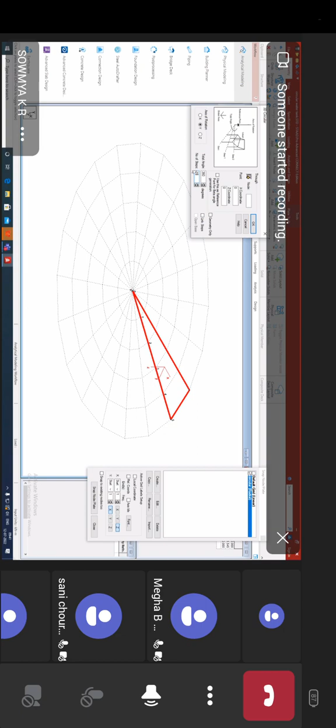The axis of rotation is Y. As we know the direction, it is all in the Y direction, and towards 360 degree, how many number of bays we need? Number of steps is equal to bays is equal to your divisions, so that will be 20. So whenever you click OK, automatically you can see your 20 bays, your plates will be created, and you can see the axis as well.

So for every plate your orientation is being turned on, and to turn off the axis that we have, it is all about Shift T. Again you have to press Shift T so that the axis will be turned off.

You need not want to mesh. Close this dialog box, meshing is not required as it is being meshed to an approximate level. So as of now the meshing is not required.

So we have created only the base of the water tank, isn't it? We have created only the base of the water tank. Now go and select your node cursor, and select any four nodes. You can select any four nodes from here, it is all any four nodes that you can able to select.

And on the geometry you can go for the translational repeat. Again on the Y direction it is all -8 meters. I'm creating the columns. It is all link steps, and when you click OK, you can able to see that the columns will be created. Choose any four nodes, go to the select menu, choose any four nodes, and create a column to -8 meters so that it will be created.

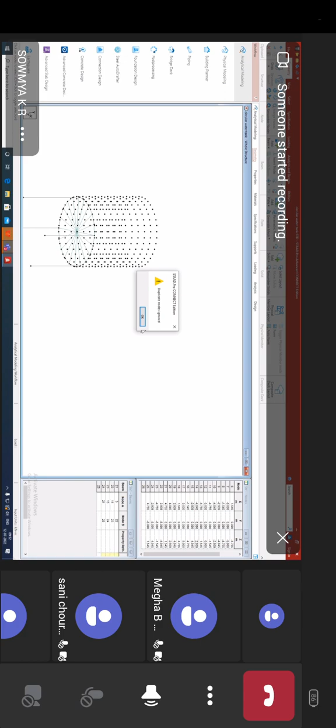I'll go for the edit, add or paste model in Staad Pro, and you can merge it. So you can see that it is all being created.

Got it? And now I'm keeping the structure on the front view. Keep your structure on the front view. Again go to your plate cursor.

Select only the bottom plates. Why am I selecting the bottom plates? To close the water tank. No, you should keep your structure in the front view.

Okay, now go and select your plate cursor at the bottom, and you can go to the translational repeat. I'm going Y, and the default spacing will be 10. The link steps and open base are not required.

Okay, it is not required. I'm going to close the water tank, and that is why I'm selecting the base as the lid. I'm going to close it at the top.

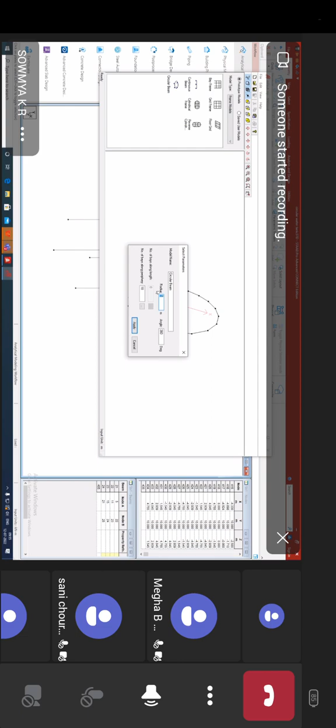Can you see? Circular beam will be there, no? Double click. You will have your circular beam in the radius along 360 degrees. Go to edit, add or paste, and that will be created at the origin.

Can you see now the circular ring beam is also created? Okay. Yes, do others have any doubt till now? No doubts. Okay, Priyanka, Chowdhury, Shylaja.

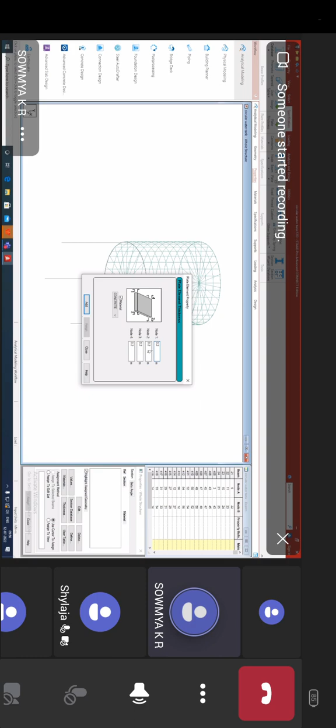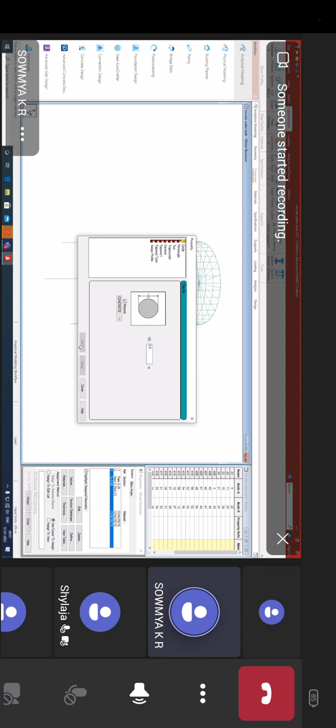So it is all about 0.2, and again you can go for define, and rectangular it is 0.3, and again I'm going for 0.6 meters. Since it is in the water tank, I'm going for 0.6 meters of the dia.

So select your plane, go to assign to view, and that will be assigned. And you can go for the rectangular, though I have my ring beam at the bottom. Keep your structure on the front view and assign it.

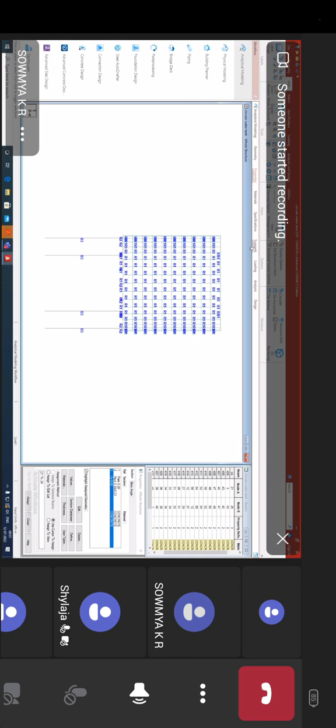Select your circular property and assign it to the columns.

So I'm going for the pinned support now.

Okay, please make a note for the bottom plate. Interpolation should be along the x direction, and your direction of pressure should be on the y direction, and you can click on add. So I'm clicking on add so that the load will be created.

Again, select your live load and click on add. Again, you can go for the same plate loads. Again, I'm going for the hydrostatic. Again, I want to select my plates. No, select all the plates, not the top one.

Okay, please leave the top plates. You need not select the top plates, considering my water tank will have water for the full tank. Yesterday we analyzed for the condition only for half of the tank, isn't it? Now we are going to analyze the water tank for the full tank. So I'm selecting all the plates, but you should not select the topmost lid - that is not required.

So I have not selected the topmost one. Only the plates that I have just selected. Again, you can go for minus 120, and it is all minus 180.

The interpolation will be along y, and the direction of pressure should be local z. Please make a note for the other plates. Your interpolation along the global direction should be y, and the direction of pressure should be z.

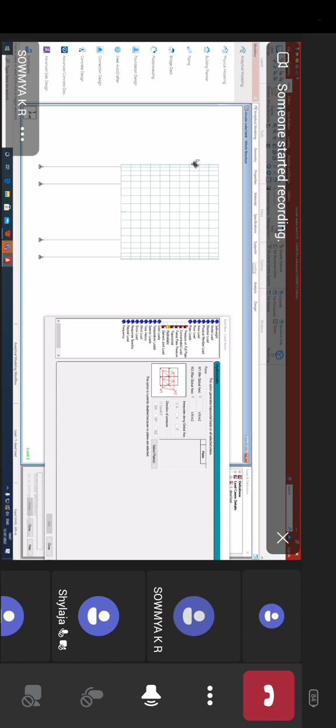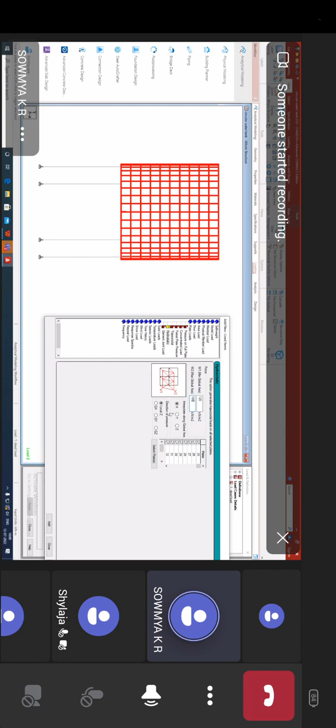I'm selecting all these plates. Again, I'm selecting one at the top as well. Again, I'm giving like 120, 180 along interpolation along GY and the local Z, because it is all circular, no? So you can go for local Z.

So you can see that the water should be pushed from inside, it should not be from outside. Can you see? I have just selected one load. No, the water pressure for the full water tank should be pushed from inside. Okay, that is what we would be creating.

And you have to give the value in the positive. You're supposed to give the value in the positive, and that is why I have changed it. And I'm going for the analysis command - perform analysis, print all, add and close, and running the analysis.

And now I'm going for view output file, or you can directly go to the post processing mode, click on apply and OK. And now you can go for the plate results.

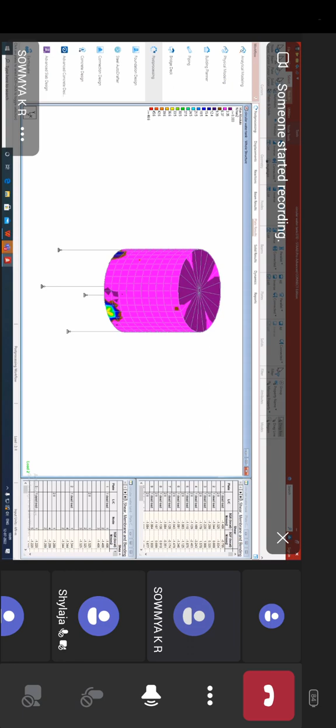So it is all maximum absolute pressure. Go to the bottom plate. You can able to see the pressure from here. So here it is all being the maximum pressure that has been applied.

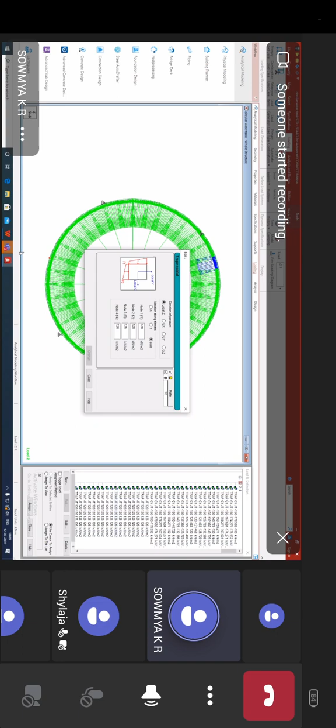So I have told you, on the analytical, on the loading, you have to give the positive value. Okay, the direction will be local Z only. The variation will be along the X direction only, but it should be your nodes, no, so that should be your positive value. We should go yes.

And you can able to see it will get analyzed. You can able to see that the circular water tank will be analyzed. The concept of giving the positive one, no, it is all being applied from inside. So it is all being applied from inside, and that is why we are giving it over here.

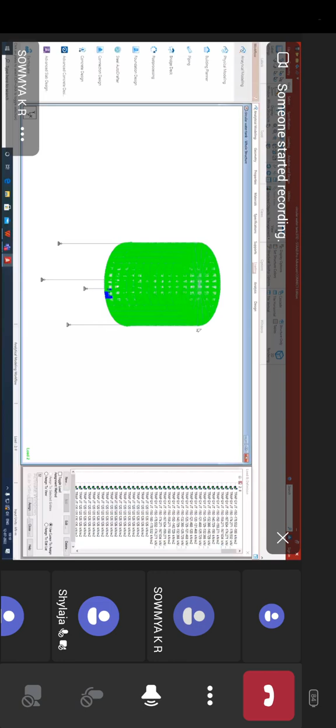Any doubts on the water tank? Do you all have any doubts on the circular water tank, everyone in the meeting?

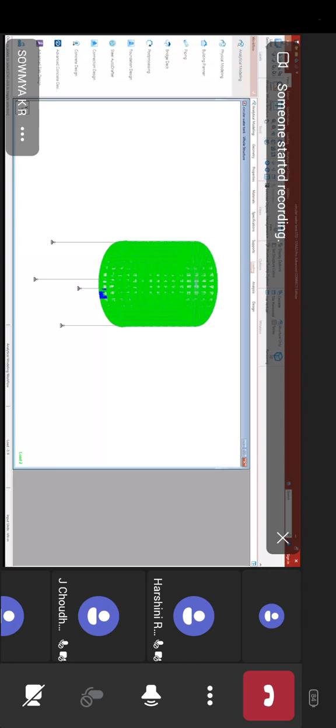Okay, so now we are going for the solid modeling. Now we are going for the solid load.

So now I'm going for the geometry solid. It is all about the complete solid modeling we are going to do, the solid generation, or solid modeling, anything you wanted to do, you can see the solid will be there. And even on the grids also, your solid grid will be there.

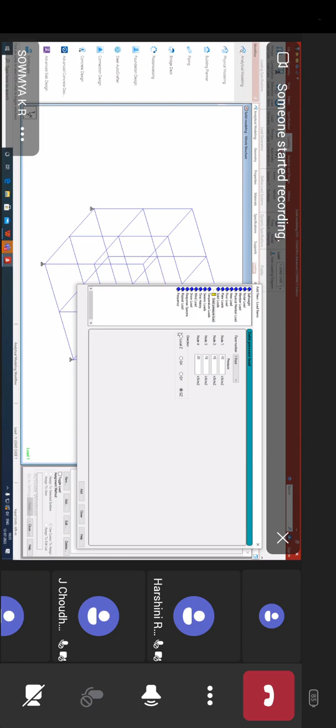So minus 10, minus 15, minus 18, minus 20, and the direction can be your GZ, or it can be the local Z. The direction can be the local Z, and you can add.

Now select your solid - you should go to the select menu, and you should make use of the solid cursor from here. So this is one solid, this is another, this is one more, and this is one. So these were all the solids - 1, 2, 3, 4, 5, 6, 7, 8. So totally there are 8 solid blocks we do have.

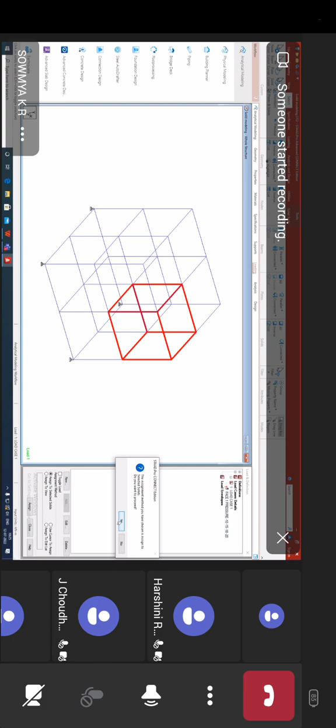Now I have just selected this particular solid. I have selected the load, and I'll go for assign to selected solids, assign, and click yes. So you can see that your solid load will be given. Any solid that you need, you can go and directly assign.

Considering your entire block as solid. Okay, consider your entire block, no, this is your structure. Considering this structure as your solid, only the outer to outer surface we are considering it as the solid, and it is all being created.

Considering we do have a block, so considering this particular solid and the outer to outer structure, we are applying the load, and we are analyzing it. Whose doubt is that? Hope it is clear. When do we use the solid modeling? Considering only the outer to outer structure.

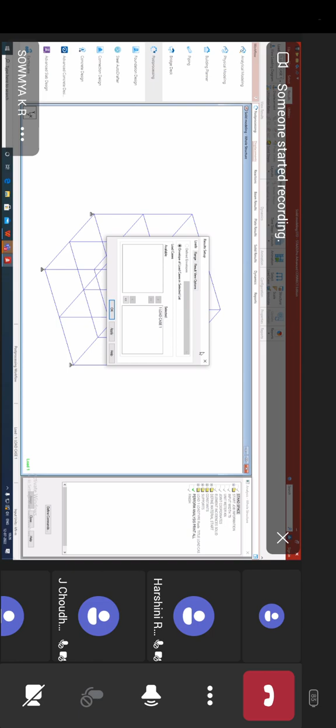Again, I'm going for analysis command, analyzing, add, and close. Again, I'm going for running analysis. So your solid modeling will be there, and you can go for the solid results and the pressure. So it is all about the pressure that we will have, completely the pressure that we will have.

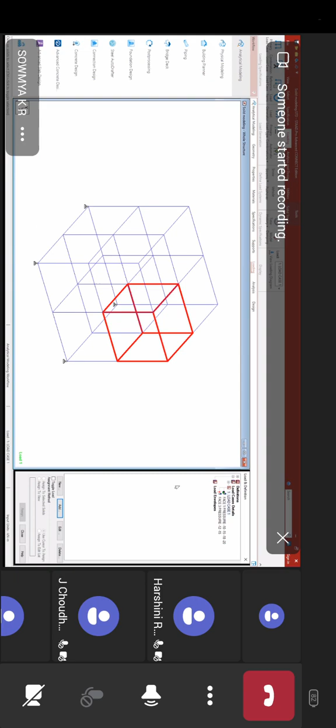Select your load case and you can go for adding. Again go for the solid load. Again you can go for the left side, -12, -15, yes, GZ, added. Again select assign, click yes, and that will be assigned.

So you can apply to all the 4 sides as well.

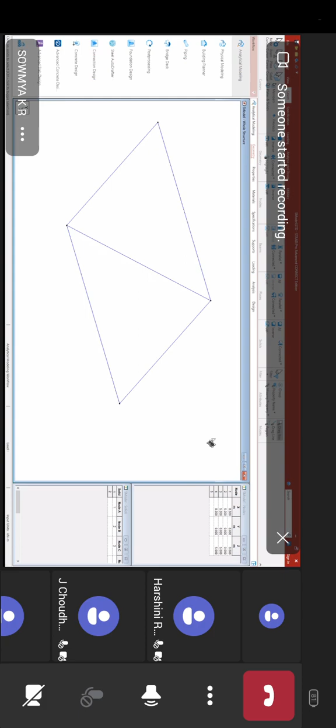Okay, so I'm going to file, new, plate models, and I'm clicking on create. Go to your grid, your quadrilateral plate. So here you can see there is a small plate that we have created, all about the plates that we have created.

Now I'm going for the specification and you should go for the plate. Please make a note: the element release in plates should be created on the specification, and you should go for the plate, and here we should go for the release.

So you will have 4 nodes, isn't it? Your plate will have 4 nodes. Which node do you want? Node 1, node 2, node 3, or node 4? So which node do you want?

And you have to release your bending moment. So you have to go for the bending moment in X, or you want to go for the bending moment in Y, or you have to go for the forces. You want to release your forces in X and Y.

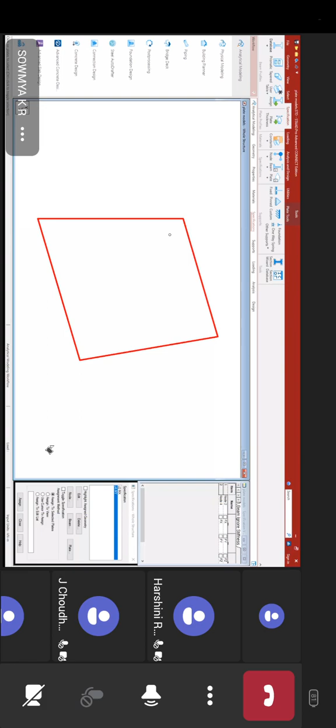So here you can see joint node 2. Suppose you want to go for joint node 4, and I would like to release it in MY, so it can be released, and you want to assign, and that will be assigned automatically.

So you can see that at joint 4 as well as joint 2, your element release will be made for all the plates.

Yes, do you all have any doubts? Do you all have any doubts till now?

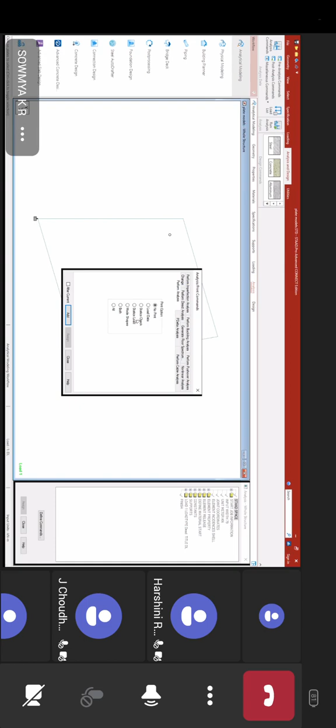Now I'm going for the loading. So it is all the dead load. I'm just adding only the self weight. Assign to view, so it is all being assigned. You can go for analysis, print all, add, close, running the analysis, view your output file.

By default, there will be no codebook that is all being available. 1.5, it is all according to the limit state method. Limit state, your factor of safety is 1.5, no, and that is why we give the 1.5.

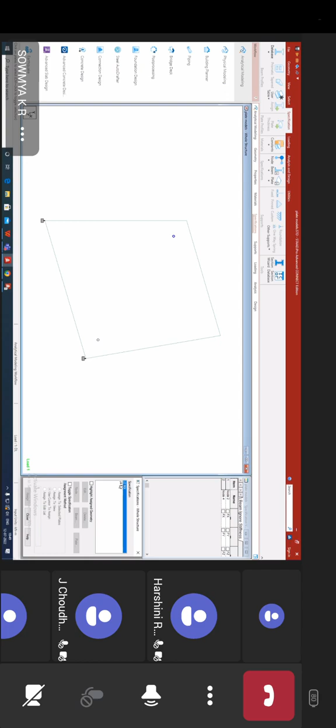Can you see there is a release in MX and MY at joint 2 as well as joint 4? So there is a release, no? So on the output you can see your MX and MY will be 0. This is all called your release.

And you can see only the MZ will be there everywhere, which means there is a load that is all being acting on the MZ. Now we all understood why we make use of element releases. Whenever you are going for the element release, which means in that respective direction your moment will be 0. This is the concept of the element release in plates as well.

Is it all very clear? Megha and Subhendra, Harshini, everyone?

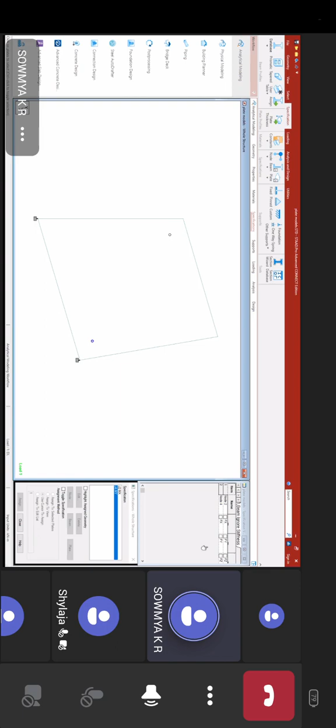Now we are going to see about the composite decks. I'm going to teach you about the composite deck now. Please make a note. The next topic is all about composite decks. It is all about metric, and we will click on create. So it is all about metric and we are going to create the composite decks.

Please make a note. It is all about composite decks, creation of the composite decks.

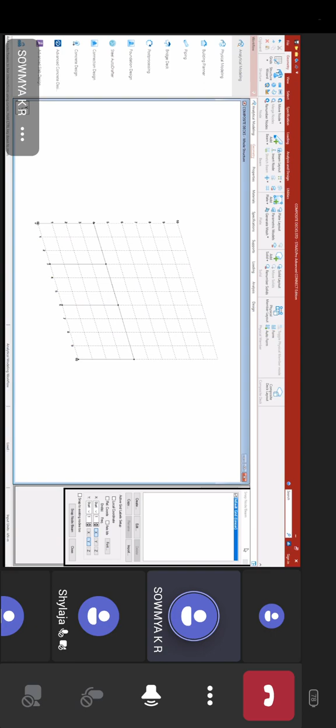Okay, so I have just created all these as my columns, and select only at the top. I'm going for front, select all these beams, and you can go for the structure wizard.

I'm going for translational repeat, and I'm going for the Z direction and number of 2 link steps in open base. Okay, I'm giving it in the Z direction. The number of steps I need, and the default step spacing can be 5 meters. Link steps in open base.

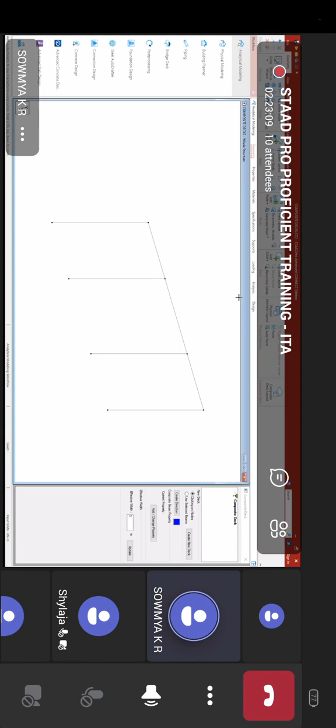So it is all about 0, 5, 10. Again you can go to 5. Again you can go for snap node or beam. One more on the 7 I'm creating, and one more on the 3 I'm creating it. So select your entire frame, how I'm selecting it.

Again go to the translational repeat. So on the Z direction, it is all about -5 meters, and I need the number of steps to be 2 link steps, and you can enable open base.

Please make a note, only one we have created. So after creation of one, after it is being created, okay, you should go for the Z direction, number of steps to be 2 and -5 meters. Again it is all link steps and open.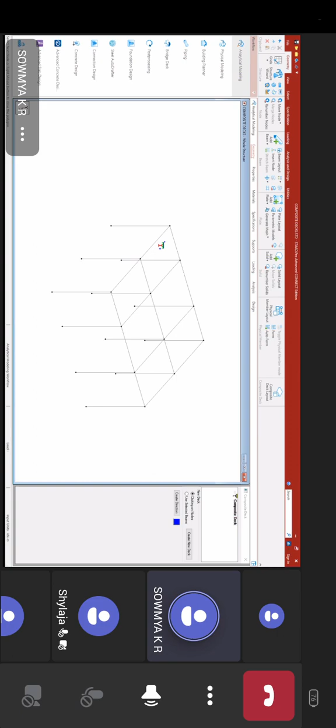And here we are supposed to go for the create deck. So it is all 1, 2, 3, 4. Again back to the first option, and it will ask you the name. So it is all about your deck slab, isn't it?

So I'm going for the deck slab from here. I'm just giving the name as deck slab and clicking OK. Automatically you can see that the beam will be created. Once it is all being created, the deck, next it is all about the direction.

So in which direction the composite deck layout is being created. You are supposed to select 2 beams. If you select these 2 beams along the Z direction, and click on create direction, automatically your direction will be created. Suppose if you're selecting these 2 beams and going for create direction, along that direction it will be created.

So if you're selecting one beam and go for create direction, 2 beams need to be selected. It will ask you in the same way. So I'm selecting 2 beams like this. Can you see? Going for creating the direction, you can see the deck direction will be created. Either the horizontal way that you need, or something on the vertical way, you can see that it will be created. So this is all called your deck slab and your beams are all created, no?

And next you can add or change any existing property. I wanted to give the property for this deck layout, so I'm going for adding or changing the property over here. The moment you click on adding or changing, select all your beams.

It will say that it is all about an Indian... Please remember, this is a composite deck. Whenever we call it composite, it means two different materials will be applied - one will be your steel and one will be your concrete, isn't it? It means your beam property - so it is all about the composite beam property we will call. So all your beams will have composite steel as well as concrete.

What do we mean by the direction? Create direction, that is what is your doubt, no? Changing direction means along the one way slab, or it can be along the two way slab. Say for example, let me go and create the slab over here.

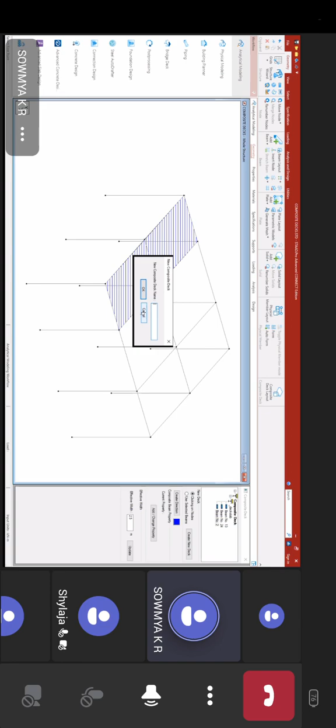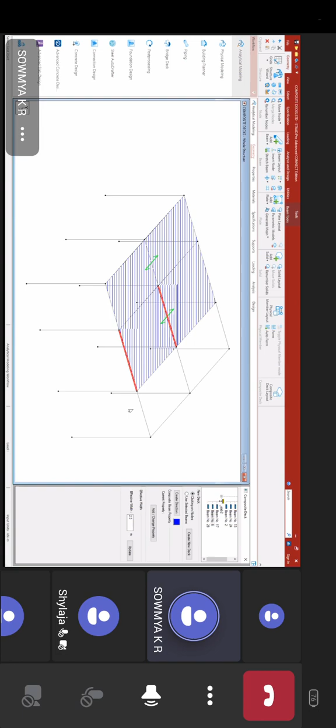And again three more beams are all being created. So it is all completely which direction you wanted, in that direction your beams will be created. So either it can be a one way slab or it can be a two way slab, and only that you can see that your beams, your direction for your beams, it will be created. It is all completely the direction.

So in which direction can you see the blue color one? Maybe you want me to change the color. I'll change the color also.

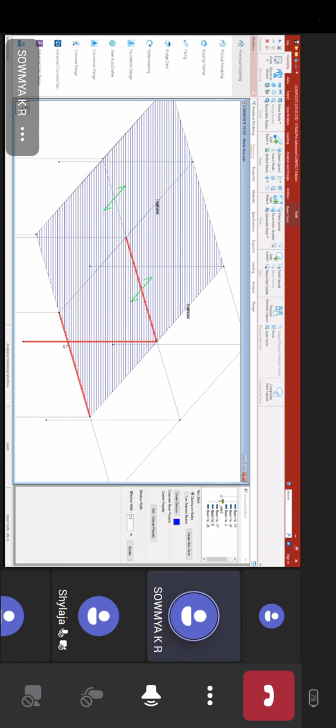Which direction does it go? Suppose if I'm going for these two, create direction. Again the direction will be changed. Okay, so now it is all about your ISMB 200, and it is all being given.

And now I'm going for effective width. So what is the effective width? It is all about 3 meter, and that will be updated. Now the effective width of your slab, that you can able to see, it is all being updated from here.

Can you see? So now it is all your changes that we do have, and you can able to see the beam, it is all being applied. And now if you want to change the direction, okay, I have just created everything. Can you see the concrete properties?

See, you're selecting your deck slab, and now I am going for my concrete thickness. Can you see the concrete thickness? It is all about 0.15.

And what is the unit weight? It is all 25 kilonewton per cubic meter, and my concrete grade will be 20,000. So it is all 20,000 kilonewton per meter square. Please make a note, it is all 20,000 kilonewton per meter square.

Now I'm going for the stud diameter. Stud is in small column. Stud will be given only in the bridges, and that is in small column that we will have, which will be very much used in the bridges.

So you can go for the stud diameter of 1.5 inches, or it can be 3 by 4, or it can be 5 by 8. So what will be the stud length? You can give the stud length to be 1.5. Mostly that will be in small one only, so you can go for a stud length of 1.5.

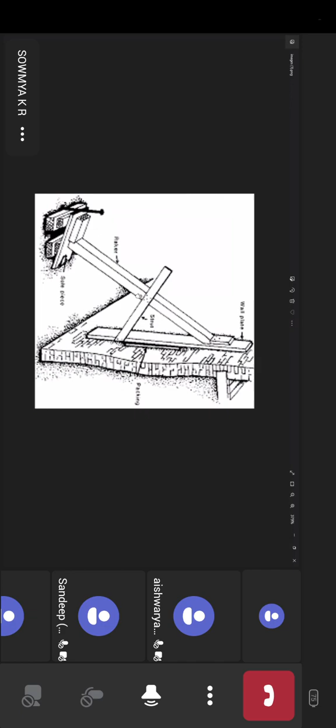So here you can able to see this is a strut or start, that will be in small column, and that will be connected to another beam. So that is all called as shoring.

Shoring, or your strut, whichever you say, that will be connected, or it is all being tied up with some other element, and that is all called as your strut. And this is your wall, and this is all called as your shoring.

So stud diameter, you can able to provide it. Now you all understood? Is it all very clear of your composite decks? You have to create a small deck, and you have to choose your create direction, concrete thickness, your unit weight of concrete, your concrete grade, and the properties for your beam.

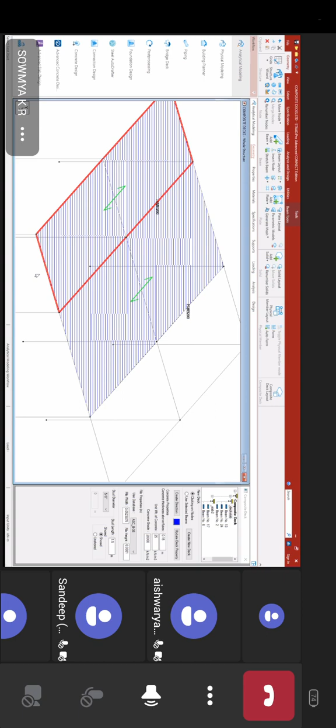15 डिग्री पर क्लियर है। 8 चाहिए, ठीक है। 8 देने के बाद मैं इसे ओके करूँगा, तो मेरे हर 15 डिग्री पर मेरे पास 8 लाइनें आएंगी। कर लोगे, वापस करके बता दो।

लाइन बना दी, ठीक है। रेक्टेंगल बनाओ। रेक्टेंगल बनाता हूँ, रेक्टेंगल बना लिया। मैं गया रोटेट पर, फर्स्ट पॉइंट चूज़ करा।

फर्स्ट पॉइंट चूज़ करने के बाद उसमें मान लो कितना डायरेक्शन आप देना चाहते हो, डुप्लीकेट कितने देना चाहते हो, और एंगल कितना देना चाहते हो हर एक डायरेक्शन के पीछे। तो मान लो मुझे यहाँ पर सिर्फ एक ही डुप्लीकेट चाहिए, ठीक है, या मुझे 4 चाहिए, और चारों 90 डिग्री पर मुझे चाहिए।

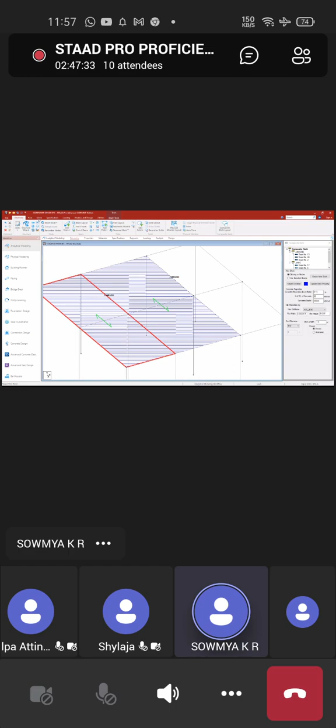ठीक है, तो मैं क्या करता हूँ, यहाँ पर दे देता हूँ 4। इसका एंगल दे देता हूँ सबको 90 डिग्री। अगर 90 डिग्री पर सेलेक्ट करते हुए जा रहा हूँ, तो ये दो बीम तैयार हो गए। समझ में आ गया?

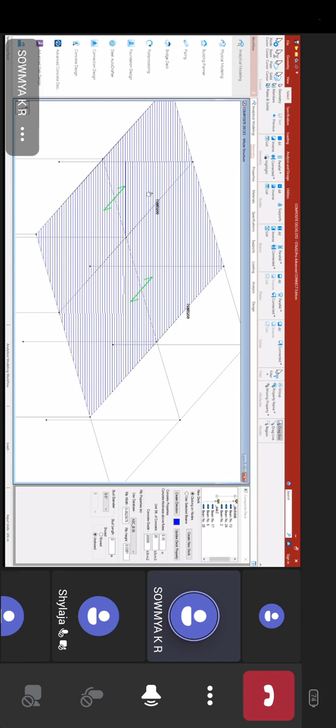ट्रांसलेट कराता हूँ। अब ये मुझसे पूछेगा क्या देना है क्या नहीं। ध्यान रखना है, ओके का मोड है ना वो, वो तब तक डार्क नहीं होगा जब तक आप मेन चीज़ नहीं करोगे। जैसे मैं इसको सिलेक्ट करूँगा, सेलेक्ट करने के बाद मैं इसको पॉइंट दे दूँगा, अब वो पॉइंट डार्क हो जाएगा।

पॉइंट देने के बाद मैं क्या करूँगा, कितने लेने हैं मेरे को, 8 लेने हैं। अब पॉइंट दे दिया मैंने उसको। अब पॉइंट देने के बाद वो पूछने लगेगा क्या है क्या नहीं है, ओके करने के लिए बोल दिया। जैसे मैं ओके करूँगा...

देने लग गया, ठीक है। अब मैं चाहूँ तो इनकी डिस्टेंस चेंज कर सकता हूँ, क्योंकि सबकी डिस्टेंस मैं यहाँ से दे सकता हूँ। और मैं जितनी भी कॉपीज़ हैं वो यहाँ से एडिट कर सकता हूँ, कितनी चाहिए। अब मुझे मान लो 4 ही चाहिए, ठीक है, तो जैसे मैं इसको ओके करूँगा तो 4 आ जाएगी।

और लेंथ जैसे मैं कर देता हूँ 50, ठीक है, और ओके कर दूँगा। तो देखो 4 आ गए, 4 कॉपी आ गई मेन ऑब्जेक्ट के अलावा। और उन दोनों के बीच में जो डिस्टेंस है वो 50 आ गई है।

50 किस चीज़ की डिस्टेंस है, इस पॉइंट से लेकर इस पॉइंट तक की डिस्टेंस। समझ में आया, ठीक है। अब उसको जहाँ पर मुझे सेट करना है मैं वहाँ पर सेट करता हूँ। दोबारा बताऊँ?

Can you change the color? The direction between the selected beams are changed.

Yes, of course. पॉइंट बना लिया, इस डायरेक्शन में ये दोनों सिलेक्ट करके ट्रांसलेट पर गया। और जब भी मैं डायरेक्शन के लिए जाता हूँ, तो कितनी कॉपी लानी है वो लेना है, 5 इसके अलावा, ठीक है। मान लो अगर आप इन दोनों को सिलेक्ट करो, मैं जाके नया डेक क्रिएट करूँगा।

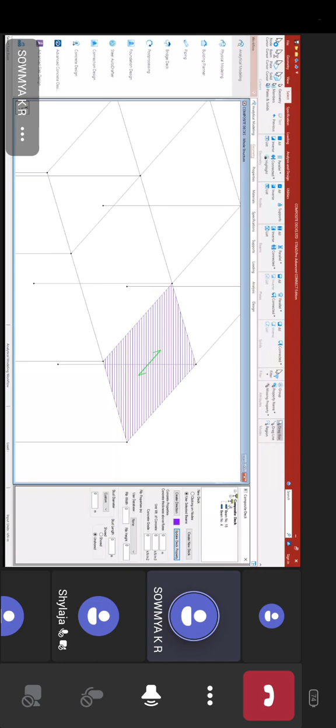Now you select your beam, and now I'm going for 0.15. Unit weight will be 20,000 and your concrete grade will be, oh sorry, unit weight will be 25, and using the above database it is all Verco N, stud diameter it is all 1, stud length it is all 1 meter.

Now is it all very clear of creating the composite decks?

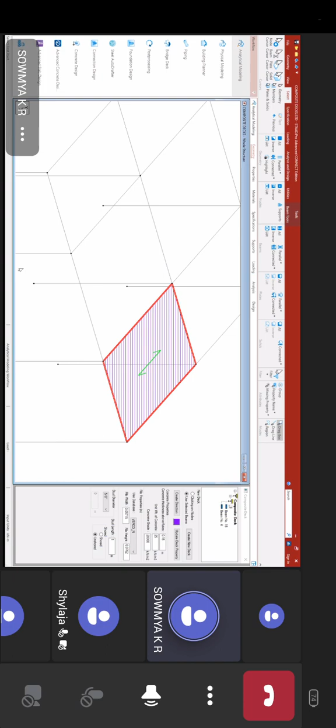It will be saved in this format, after saving we will let you know, no problem. But for this we need to create the column also, right? For the support, yes. But this is only a deck slab.

Okay, now we are closing this composite deck. Again the rest of all the procedures, it is all being the same. I'm just saving it. This is my structure, and for this structure all these slabs I'm considering as my composite deck slab. I'm considering this is my steel beams and my concrete slab, and again I'm closing the deck slab layout. Again I'm coming back to the normal structure. Again the same procedure you have to give. No loading and analysis, I did not apply the loading. It is all only the creation of the composite decks, and that is why I am just creating only the creation of the composite deck.

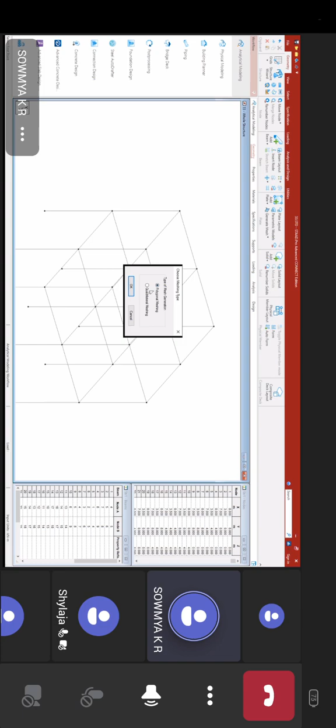Can you go for the generate mesh? Can you see, it is all about the generate mesh that we will have, it is all about the create mesh. So 1, 2, 3, 4, again back to the first one. I'm going for the quadrilateral meshing and you can click apply and it will be meshed. It is all about the slab as well as the wall connection that we will have. You can see that it will get meshed, this is all about the slab and that slab should be meshed.

Okay, no, my screen is not getting freezed. It is not getting freezed. Guys, is my screen got freezed? I have connected from the... Oh, it is working only.

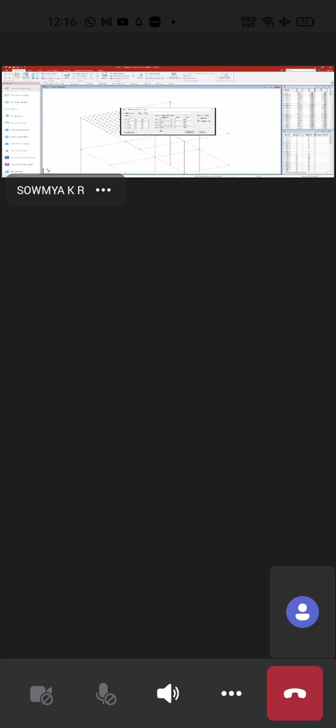So now you can see, it is all about the slab and then the wall connection. It is all about 1, 2, 3, again back to the fourth point, again back to the first point. It is all your quadrilateral meshing and you're applying the divisions. Okay, so now your slab and wall connection. I repeat, the slab and wall connection will be generated from the geometry, and on the structure panel you will have your slab or wall connection. So I'm going for the slab or wall connection. No, so this is all the first point.

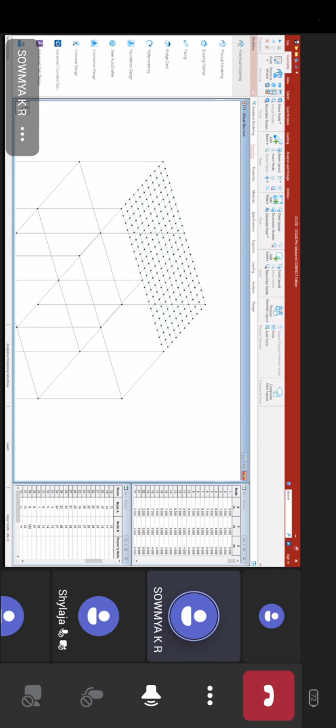Slab or wall connection I have given, no. So 1, 2, 3, again go to the fourth one, again back to the first, and it will ask you how many divisions you need along the wall. Can you see how many divisions you're supposed to create it?

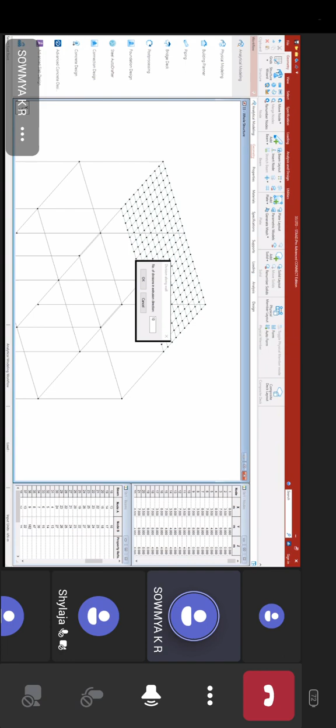Okay, only now I'm teaching it. So it is all I have just created in structure wizard. Oh, I did not share you the full screen. Okay, so how did I get this particular model? I was getting it from the structure wizard, and that is why I hope you were saying that it is all being freezed. And I went for the framed models, and it is all about my bay frame.

And the length I have given it to be 7, and the height to be 6. Both need to be given here, and the width it is 8, and the number of divisions to be 2, 2, 2. That is how many number of divisions I wanted, and I'll click apply. Can you see the structure? It is all created, and I was bringing this structure to my Staad Pro.

So I have brought it to my Staad Pro, and now I'm going for my Multiply and generating my plate design mesh. Can you see? Your mesh can be created. You can see that your design mesh can be created from your geometry, from the geometry menu, and from the design plate panel, you can see that your mesh will be created.

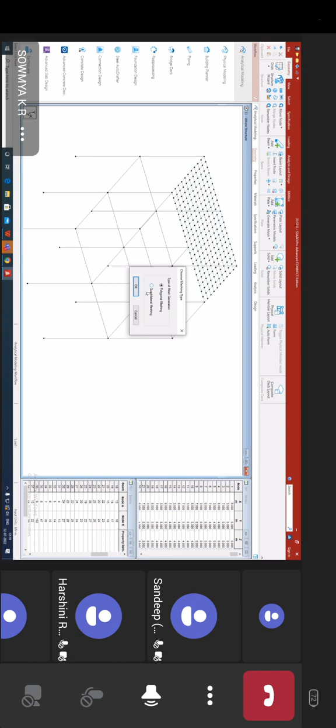So it is all about creating the mesh, and you can see 1, 2, 3, 4, again back to the first one. It will ask you either you need the quadrilateral or maybe the polygonal mesh. So it is all about my quadrilateral meshing. So I'll go for my quadrilateral meshing, and I'll click OK.

So we can see that the meshing has been created. Okay, this is its slab. Why do we go and mesh? Considering this top surface as the slab, and I have meshed it, and it should be must. It is must. If you have a doubt, either we have to do all the meshing every time - of course, we have to do the meshing. So now we will go for the slab or wall connection.

From the geometry menu, from the structure panel, we will go for the slab or wall connection. Just click on the tool, and first, second, third node, and it is all about the fourth. So 1, 2, 3, 4, again back to the first one.

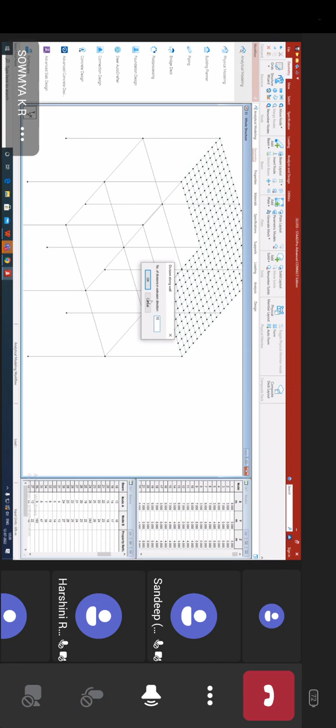So it will ask you number of divisions in the extrusion. Yes, I need 10. So number of divisions, it is all about 10. You can see that the nodes also will be created, and the meshing also will be created. But this is in surface mesh. This is all your wall.

Considering this as the wall, and this is all being meshed, and it has connectivity. Can you see? If you give 10, 10, exactly the same node, it is all being created. Here also the same way.

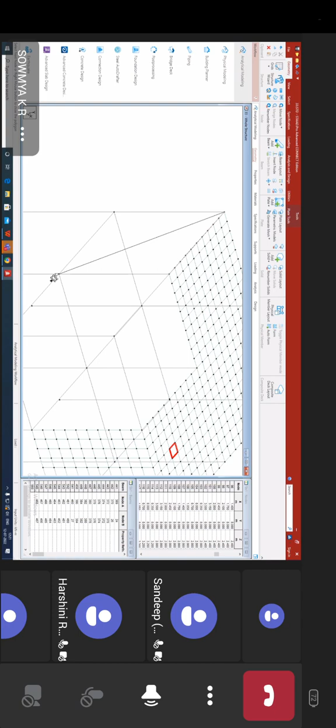Suppose, on the geometry, if I'm going for the slab, so 1, 2, 3, 4, again back to first one. If it is all 15, suppose what happens if you give 15, automatically you can see 15 meshes will be created. But that 15 meshes also is along the opposite direction. But along the slab direction, if you merge it only 10, exact 1, 2, 3, 4, 5, 6, 7, 8, 9, 10 - along your slab, along the direction of the slab, it is only 10.

But along the height, it will be your 15, and that is what your slab or wall connection will tell you. Along the wall, how many number of divisions we need, so it is all about your 10. Now you all understood the concept of the slab and wall connection. Considering your Staad Pro, it will consider the topmost surface as the slab, and the side surface as the wall.

From 11 o'clock to 12:12. Priyanka, from 11:05 to 12:12. Sorry, my screen was not at all freezed. Please check your internet connection.

Meshing can be done for all types of structures. Yes, the create meshing can be done for all the other types of structures. This generate mesh and create meshing can be done for your plates. Considering your slab as your plate, you can see that all your slabs will be created as your plates only.

Guys, was my screen freezed for the past 1 hour? Is my screen was freezed for past 1 hour? Okay. And for those few minutes and seconds also, I have repeated the entire concept again. Even the composite deck as well as the slab or wall connection, I have shared my entire screen again. Yes, that was also explained. So Priyanka, please check your internet connection for the past 1 hour. Priyanka, please do check your internet connections.

Yes, can meshing be done for all types of structures? Meshing can be done for the plates only. Meshing will be done only for the plate, because only in the plate you can see the meshing. No, plates will be done. In your Staad Pro Connect Edition, we don't have the surface. In Staad Pro Connect Edition, we don't have the surface.

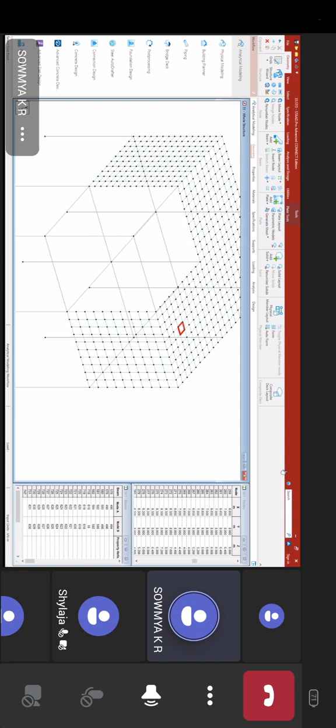So Sani has no doubts. Sandeep, yes, yes. Post it, Harshini. Yeah, post it in the chat box. No, you told me that you'll be sending it later, no?

I'll check on the same. Yes, how about others? Do you all have any doubts?

Okay, there is one error. What error is that? One error, zero warning, zero notes. Error, cannot open the file EQ data.

Okay, share me your time history. What version are you using it, Harshini? What version of StaadPro do you use?

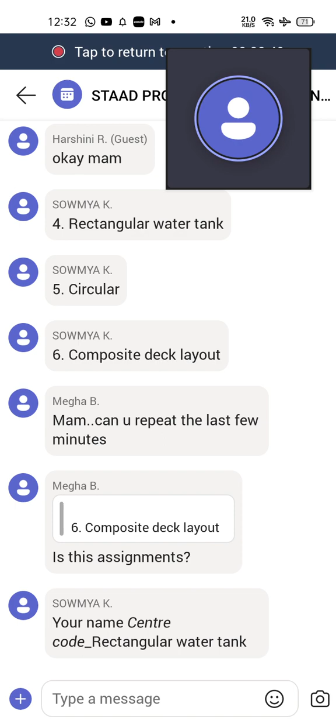Yes, only the composite deck layout. Only the composite deck layout. Only the layout I need. Only the layout I need. Yes, Megha, only the deck layout. Only the deck layout that we need.

I have posted it on the chat box. I have posted all the three assignments on the chat box. One, that is all your rectangular water tank. Your next assignment will be your circular water tank. And the last assignment will be your composite deck layout.